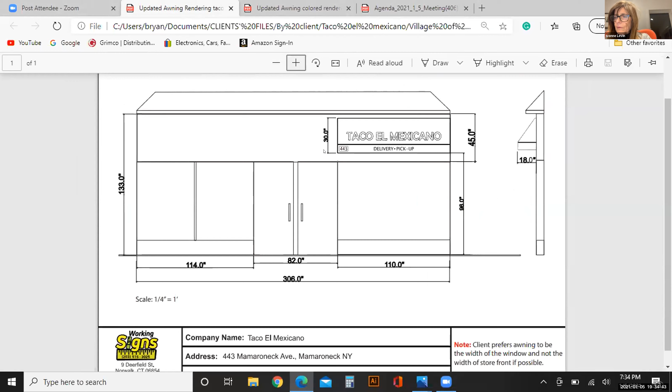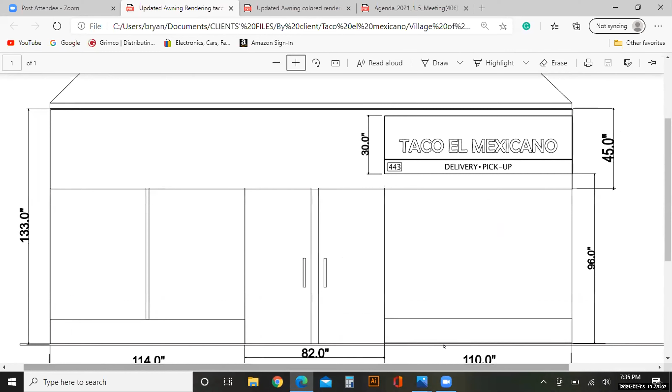Uh-oh, we can't hear you. I don't know, sorry, can you hear me now? Yes, we can. I don't know where you stopped hearing me. The last thing we heard is you said you had taken off the phone number and then said 'and also,' and that's the last we heard.

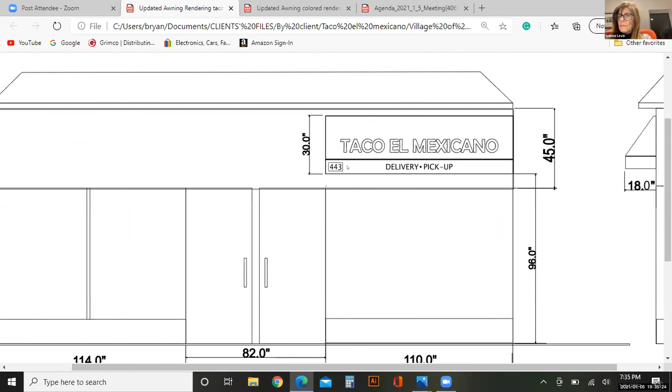Oh yes, I'm sorry. And raise it to 96 inches from the ground. I told the customer about the suggestion of going over the door, but he said he prefers to go only over the window, just to match what's next door. If you can see it on the side here, it's the same, just over the window type of awning.

Okay, interestingly, it appears that that awning next door is too low, so when that comes up, make sure that's clear also. Okay, thank you.

I think there were some other things we discussed last time, just to mention them. We talked about when you took off the phone number, how you were going to recenter it. I see you've opted to put delivery pickup in the center and leave the address on the left. We also talked about the color of the awning, which somebody suggested maybe could match Enzo's. I don't know if it does or not, but I'd ask you about that.

Yeah, I asked the customer about the color. He said if possible he prefers to keep that color, that's the color he likes. I asked last meeting too, and said it's possible either way, you guys prefer to match the other store next door, but the customer prefers that one color if possible. I don't know what others think, but it's probably okay. I think it'll be more critical whatever color goes on the next door store, but I'll let other people say what they think.

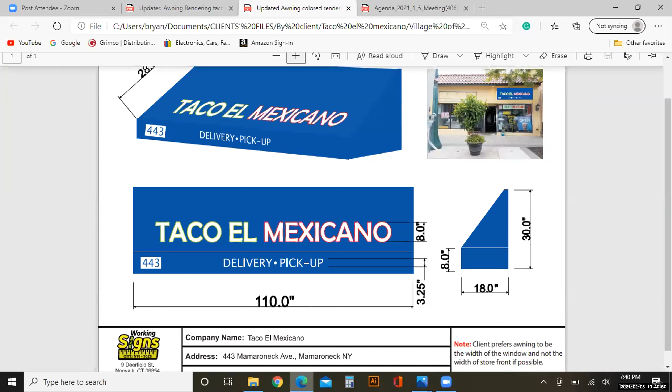Yeah, because this is pretty much to scale, so that's 8 feet. The awning is 8 feet from the ground there, but it shows it there. So I think if I put it next to this picture, it would be about the same height at the bottom as this one, I believe.

Because it will be higher than the one next door to the left. Maybe it does line up. I don't know, these people may not - I don't know what the height is, but it's just one concern I had.

Well, in fact, looking at a straight-on street view, it looks like there's that nail spa one there. But if you look at the bottom, Andrew, do you still have that up? If you look at the bottom edge of the pink ones, you can see that's a good deal higher than the bottom edge of the Wendy's nail spa one.

So they are in fact higher. I'm not sure it's really 8 feet, but certainly the nail spa is not, and certainly that pink one's not either. I'm looking up and down the street on the street view - definitely as you go further down the street, they all tend to sort of line up, though I'm not sure they're all compliant.

Maybe the answer is you make this one right and then the spa has to comply, and then things will line up. Yeah, that's the main thing, is to get the spa one to line up. Okay, so...

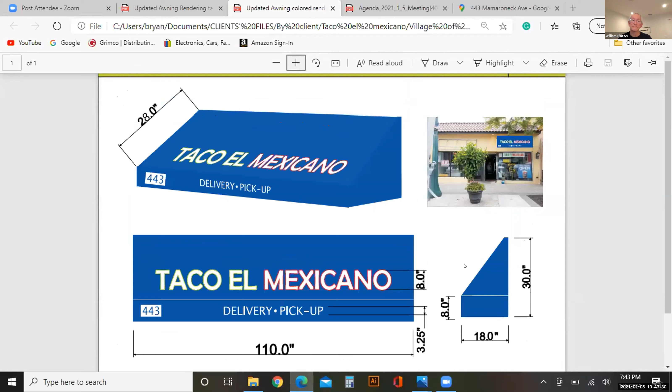I do not see anyone who wishes to speak. Are there any further thoughts from the board?

No, I think we're all kind of wishing it lined up, but also thinking it probably needs to be code. So when the next guy shows up, he's going to have to raise his awning. They're going to have to match. Yeah, that's what will happen.

Okay, any further comments from the board? If not, could I have a motion? I motion. I second. Okay, any opposed? No? All right, very good, Bryan. You're good to go.

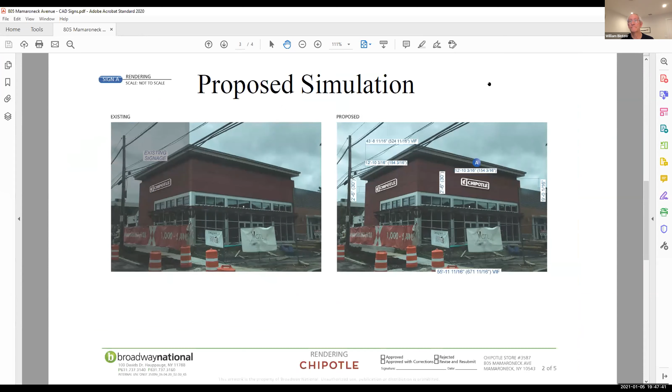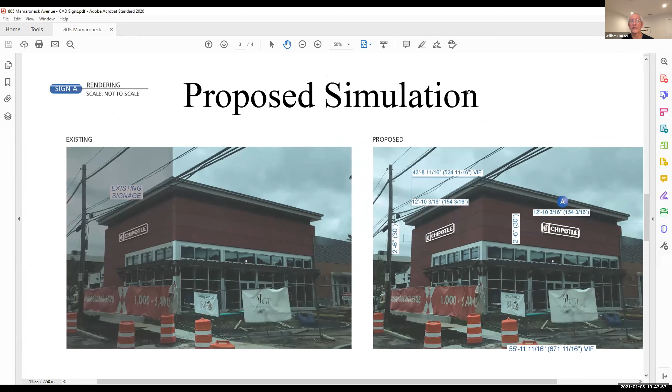Okay, now I believe I saw in your materials an elevation with the simulated sign from the parking lot. Yes. You might just put that up if you have it handy. Let me see if I can zoom in a little bit. No, I meant there was one that showed the whole parking lot elevation with the Chipotle sign on it. Oh, you mean this photo here?

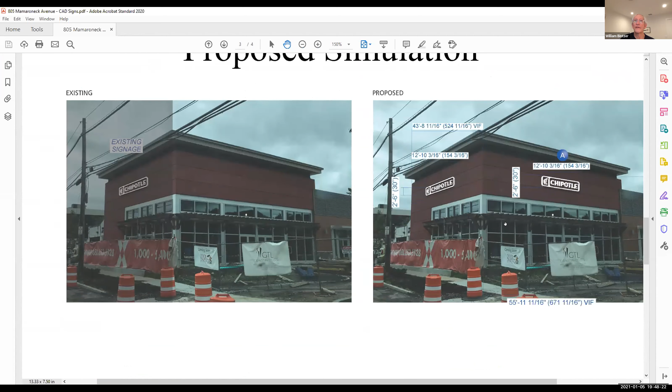There was one that showed the whole thing, the whole mall, like the whole shopping center with the sign on it. Yeah, there was one that showed it mocked up. It was a nice picture. This is the mock-up, this is the existing. No, there was one that showed it as it is now in your materials, the ones we got anyway. You mean with the signs of the other stores? Yeah, sort of like standing in the parking lot looking at the whole thing. I just thought that was a helpful picture. I don't know that it's a huge deal, but I know that there was one. Sure, let me see if I could pull that up.

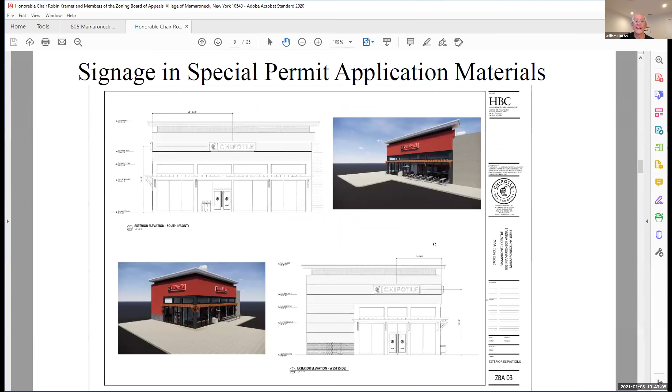This might have been from the Zoning Board of Appeals. Yeah, that was it. It looked like this, like that shopping center, but it said Chipotle on it. Right, yes, there was one like that that said Chipotle. There really was. I believe you. I believe you. There you go. There you go. There, yay, got it. See, I did look.

Okay, I think that's the most helpful one to look at. Okay, great. I think it looks fine. I do too, it looks good. Looks good, it looks good. Okay, anybody have any comment other than it looks good?

All right, anybody from the audience, Amber? Let me take a look. I do not see anyone wishing to speak. I'll motion. I second. I'm good.

Okay, that's easy. I think we were pretty well prepared for this one. Having been told it was going to come, and then seeing that it was coming, and then it came. I think we all knew what to expect, so it looks fine. Thank you, good luck with it. Great, thank you so much, I appreciate it. Happy New Year. Take care.

So, okay, the next applicant is 600 Lorraine Street.

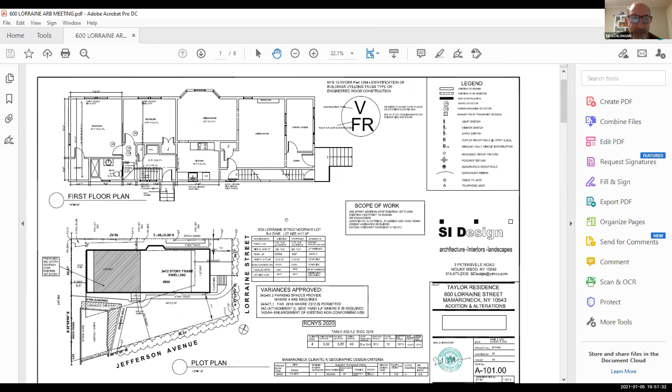This application, 600 Lorraine Street, is for a second-story addition on top of an existing first floor, and the addition is partially over it.

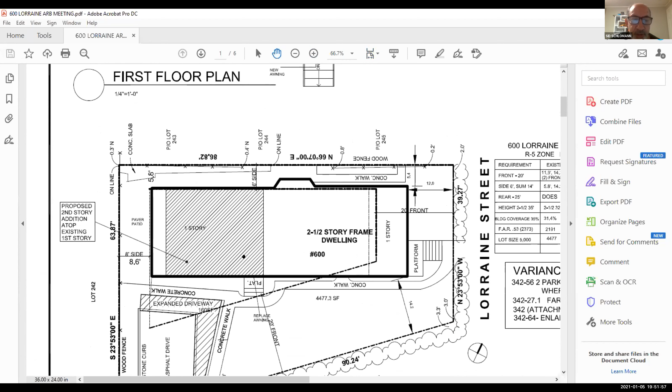We needed to go to the zoning board for a few variances. If you see here in the shaded area, the existing house in the front is one-story, in the middle portion it's 2.5 or 3 stories, and in the rear portion it's existing one-story. The shaded area here is the proposed addition. It's an existing 2-family house.

Just in terms of reference, floor plans, the goal of the project is to add an office, 2 bedrooms, and a bathroom up on the second floor for the owner-occupied primary unit.

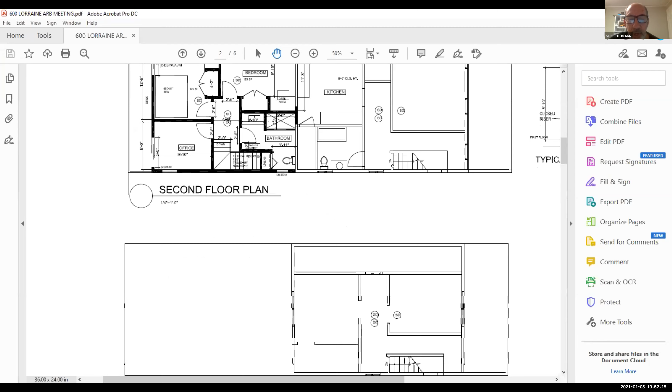So I was confused by this, if I could just dwell on the plans for a second. So if you go to the first floor... well, this is the first floor. So the entire first floor is for the owner-occupied primary residence. You can either go up the front steps and into the door here where it says entry, and that goes right into the apartment, the entire first floor. Or you can come in the side door here by the driveway, and that takes you right into the apartment.

The unit upstairs also comes up. I just want to clarify, so how do you get from, let's say you're in the living room and you want to go to the bedroom, how do you do that? Actually, this right here should be a dotted line, it's just an archway, not a wall. So that goes straight through to bedroom number 2. So right now it's 2 bedrooms, and that was what was confusing me, it looked like a whole separate unit there.

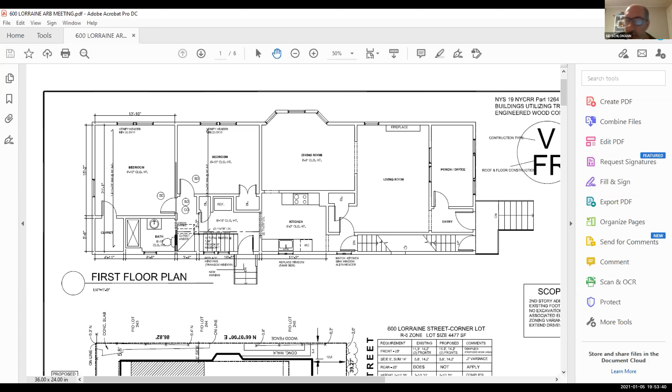Got it. And then for the upstairs tenant, they basically come in the front door here and go straight up the stairs, a self-contained second floor and above unit. Okay, now let's take a look at that. So they come up those steps to the second floor. From the first floor, they come up the steps, then they land on the second floor right here.

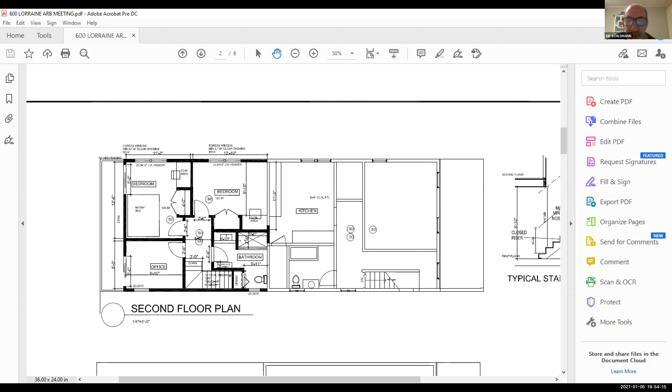On the second floor, they have the bathroom, the kitchen, and this other room, which wasn't referenced in detail because we were focusing on the other side. So this is a living room here. So basically they have the front half of the second floor, plus they have the front half of the third floor, which is, I guess, a half a story. Okay, now in the rear part is a roof.

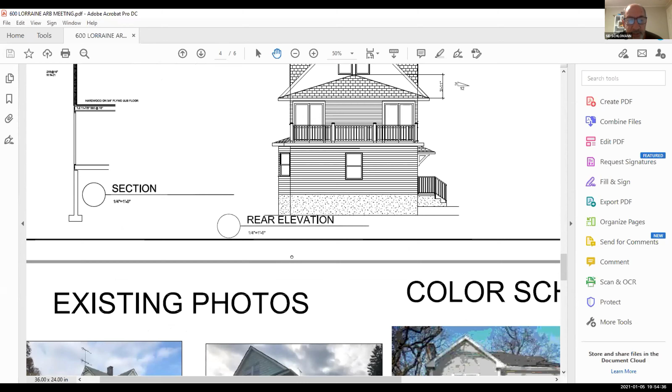I'll just continue. So right now, let me just go to the existing photos so you can see. Okay, so this is the side entrance here. If you look at the upper left photo, the middle portion is 2.5, almost 3 stories. Right here on this left part is where we're proposing to put a 1-story addition, which will then be connected to the first floor apartment.

In terms of exterior, which you're probably more concerned with, you can see there's some mismatching siding and windows. Our goal is to re-roof the entire house, re-side the entire house, and replace windows within budget.

Here's our rendering, which will be a light gray siding, a hardy cement fiberboard. The name is night gray with white trim, a charcoal roof. The windows are Andersen 200 series.

There are no grills in the existing windows, so we're not putting grills in the additional windows. We're trying to make the whole house cohesive in terms of color and trim. This will be a 4-foot balcony for the new addition, which is where the zoning board required us to stop the addition.

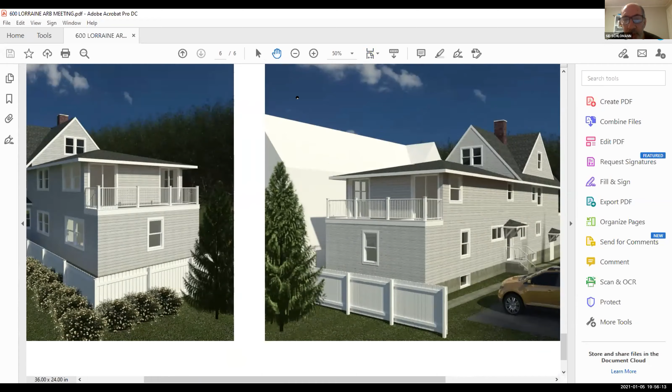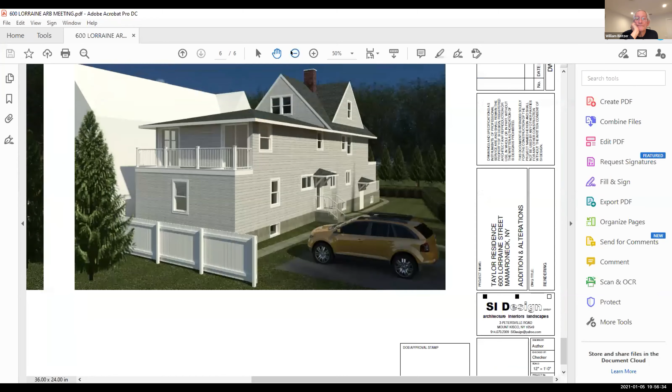So you can see the difference from the existing green and kind of beigey pink siding to our now cohesive light gray and white trim siding. Looks nice. Yeah, it's an improvement. I think it'll be a big improvement.

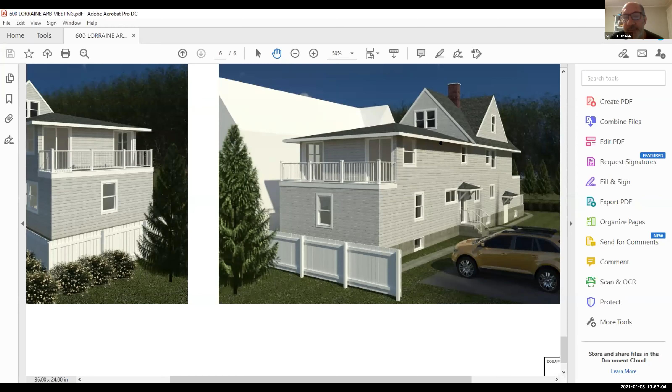You keep referencing if it's in budget, what's the plan here? Is the entire siding gonna get replaced? The siding is 100% getting replaced, as is the roof. The new windows will match the existing. The only thing that's a maybe is whether or not we're replacing all the existing windows with new ones, but they would be the exact same size, same style. It's just whether they're new or not.

They will probably be repainted, I guess, at least as a minimum, or not? I thought maybe they would be repainted, the old ones, if they stay on that top floor. You can see the existing windows, a lot of them are vinyl, like there's nothing to paint. They're not wood, they're vinyl.

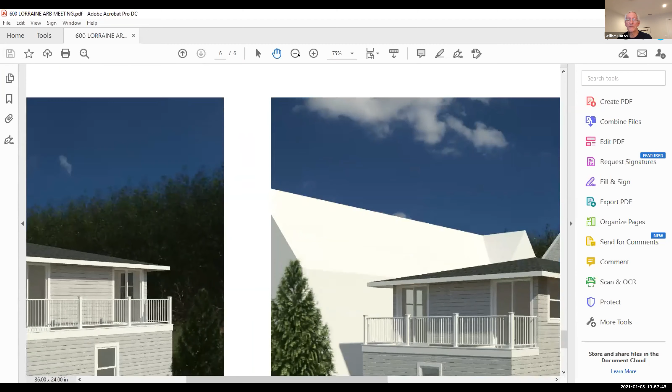I spoke some with Amber about this, but just for the record, I understand that you do have all the necessary zoning approvals. Correct.

Can I ask a question? So originally the addition went all the way to the end and they asked you to step it back, to reduce the mass of it? They did. Originally, we proposed to go all the way, and the bedrooms upstairs would have been larger. One of the variances was for floor area ratio, and they wanted to cap it at 14.9%. I see, got it.

I understand that they lost a little bit of square footage for their bedrooms, but it looks nice. No, it does look nice for the neighborhood.

Are there any other comments from the board? Questions? Okay, Amber, any audience members wish to speak? Doesn't appear that anyone wishes to speak.

And given this is a significant addition, I just want to confirm that the signs were posted for neighbors to know about this. Is the owner on? I believe the owner took care of everything. Amber, is Brian on? Yes, he is, and we do have the affidavit of signposting. Okay, cool, thank you.

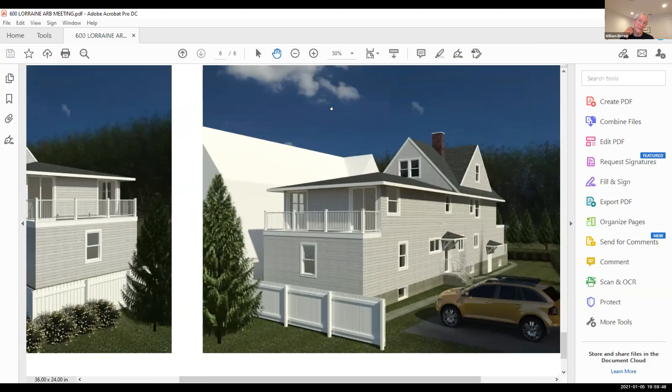So there being no more questions or comments from the board or from the audience, could I have a motion to vote on it? I motion. Second, anyone? I second. All right, I'll let Barbara figure out who was first there. And any opposed? All right, you are approved. Thank you, it looks good. Thank you. Good night.

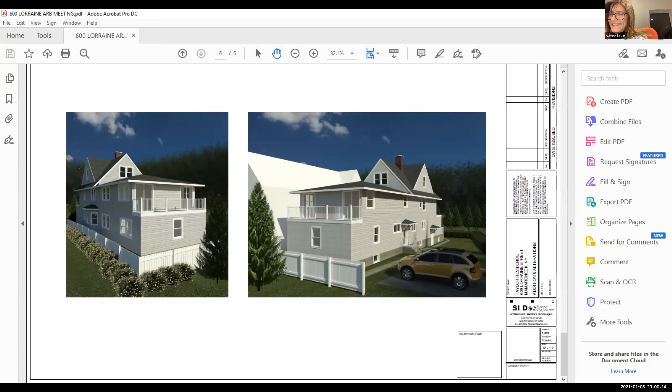Okay, so next is 705 Monroe.

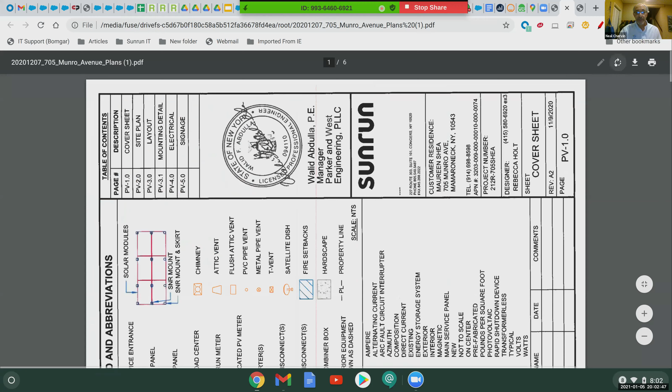Okay, so these are the general electric notes. I'll show you, this is where it's going to go up on their roof. So this is where we planned it out. They have two planes. Could you point out the front of the house? Okay, so this is the front of the house here.

Where it says N, right? Array AR2. There's array 2 and array 1. And this is the best placement for their solar, for access to the sun.

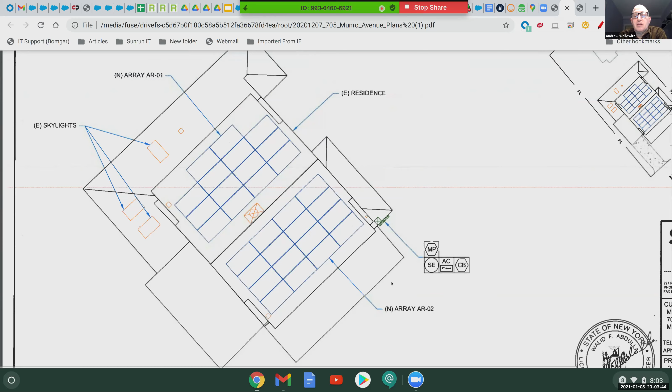Are you able to back that out a little bit so we can see the rest of the drawing, the plot plan, and where north is? Oh, there's north, now I see it. Yeah, you can just back it up a little bit, zoom out, you're too close. There you go. North, okay. I can't zoom in and out, but I can go up and down.

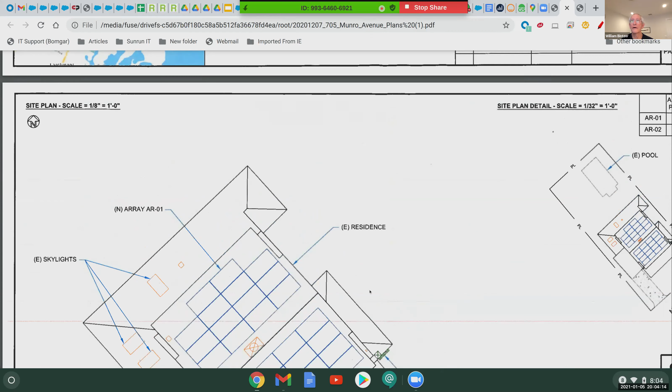So that's north. On the right, there's a pool in the back. There's a driveway on the left. There were some photos - I don't know if everyone saw the photos on the tab labeled application. I think there's pictures down at the bottom, the first one there. Oh okay, let me go back to that.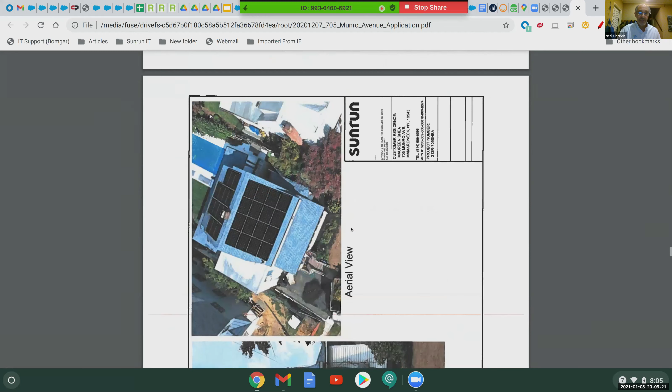So this is an aerial view, sorry that one's a little sideways, but yeah this is what it would look like. Okay for you guys? Yeah, there's another, I think there might be another one further down too.

So, all right, do you need to see anything else? I think so, just go to that front elevation picture, let's leave it on that one. Yeah, let's go back to the actual house.

Bless you. Bless you, thank you. There you go. Okay.

Okay, anybody have any comments, questions, or thoughts? Sounds like nobody has any comments, questions, or thoughts. No, we've been doing this for a while, there's not too many. We are the number one residential solar company in the US. We have 500,000 installations nationwide. That's a lot.

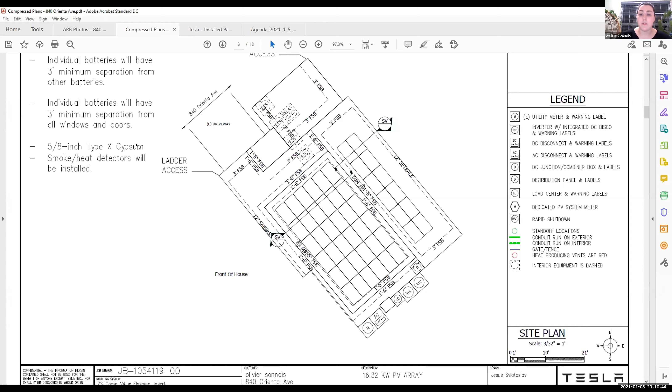Sorry, this is the house that just got the renovation, right? Yes, it's still actually in the midst of the renovation. And they have a dog. They do, a small one. Every time you walk by there's this little yippy dog.

Most of the panels are going to be located on this roof plane here. However, they're not going to be visible from street view, so we didn't provide a rendering there. We showed you a bit in the elevation here of just where they will go, but because of the pitch of that roof, it's not going to be visible unless you're incredibly tall.

There's also a row of hedges, isn't there? Yes, there is. Most of the house is actually blocked from the street, and they have that little side street as well, so they're set quite a bit back.

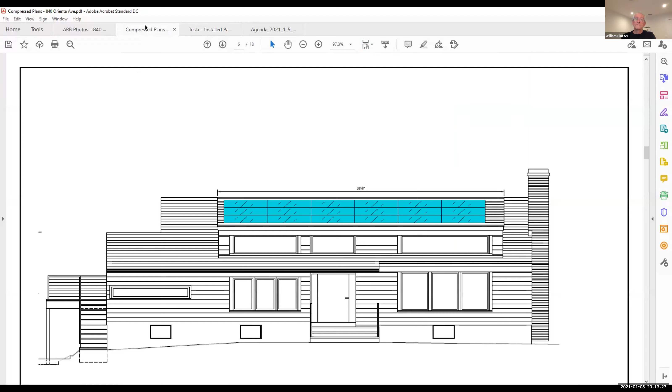Okay. Any other comments or questions from the board?

From the audience, Amber? It does not appear that there's anyone from the audience who wishes to speak. Okay.

I'll give the board one more chance in case they thought of anything they want to ask. And absent that, then I guess could I have a motion to vote on it? I motion. I second. Any opposed? No. All right, very good.

It looks nice, the whole renovation looks nice. That's beautiful, nice. Yes, hopefully now we're able to get it wrapped up soon. We've been working on it for a long time. Seems like they're on their way, hopefully by spring. Yeah.

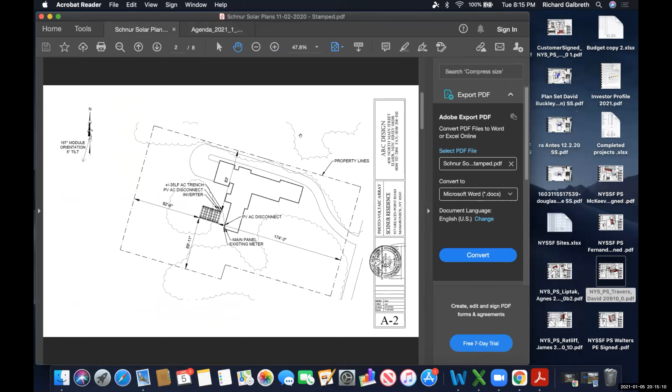Hey, can you guys hear me? We can, yeah, all yes. All right, let's see here. Let's see if I can get this shared for you. Can you guys see what's on my screen? Yes. All right, so we're working at the Daniel Schnur residence on 937 Greacen.

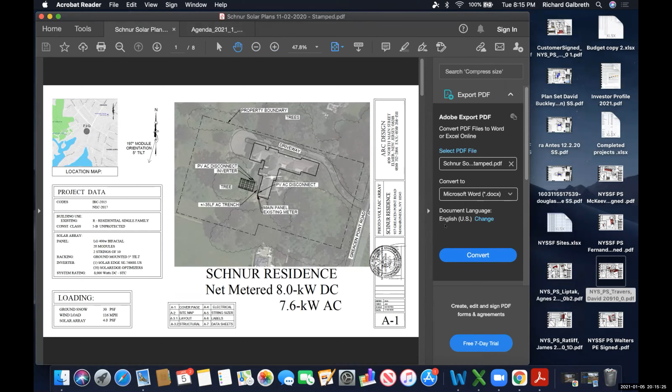We're looking to add a small ground-mounted solar array behind the house, tucked in. We don't plan on cutting down any trees. Basically, this solar array is just to charge the batteries that we'll be placing in the house next to the main service panel, which is in a utility closet or utility room type thing.

I've been working directly with the designer that's been redoing the exterior of the home for the last 2 years. So everything that we put in will be painted and done to basically the exact same aesthetic that the house is done. We can't put anything on the roof because it's all slate, and they kept it as original as possible with all the copper flashings and everything else.

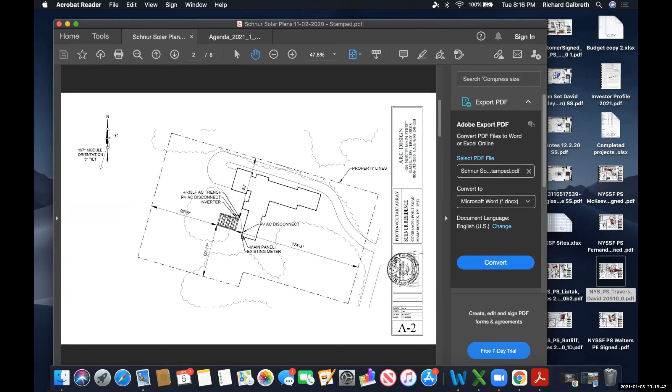So that wasn't an option. And in order for any incentive to be put in on the battery installation, we had to add solar. So this is basically where we want to put it. It's well within all the clearances. The neighbor to the south here, I'll show a photo of that in a second. Out here is the Long Island Sound, and there's really nothing else out that way, but I'll show a photo of that as well.

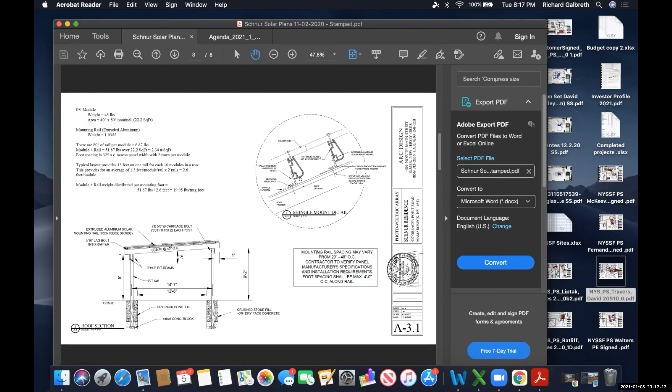We went with the minimum tilt, so it'll look just like a standard pergola or any sort of open deck covering. The panels are bifacial, so there's no back sheet, it's just glass, so they're basically like almost a see-through panel. So the grass that is underneath where the pergola will be mounted will still grow the same way it does right now.

So I tried to mock it up as well as possible with the photos we sent, but December happens to be our crazy busy season. And we also were the ones that put in the ground mount that's on Orienta Ave down the road, which I'm sure no one sees from the road. So we want this to be as aesthetically pleasing as possible as well. So let me see if I can go back to.

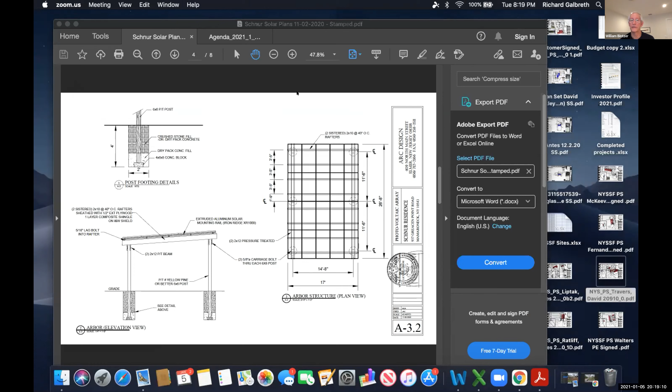Looks pretty straightforward. Are there any audience members wishing to speak, Amber? I don't see anyone who wishes to speak. All right. Okay, any questions, comments from the board? All right, well, looks good.

Okay, so looks good. All right, so could I get a motion to vote on it then? I'll motion. Okay, any second? Second. Any opposed? No. Okay, so very good.

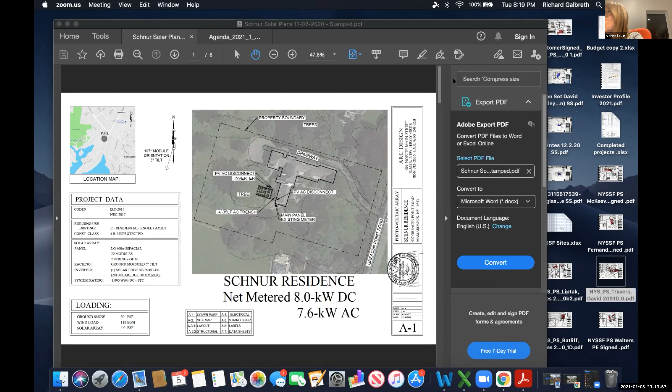And so that leaves the final one, I guess, 448 Mamaroneck Avenue.

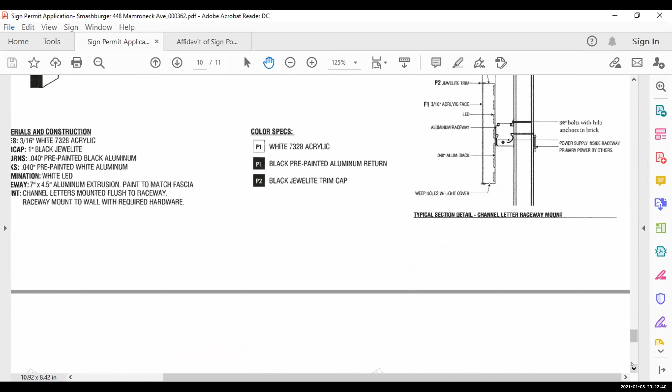There'll be channel letters mounted on the raceway for the first sign on Mamaroneck Avenue, and the second sign is just a face replacement on an existing cabinet. Does anyone have any other questions?

So it's black - okay, the background is black and the letters are white. Can you go back to the elevation, please? Sure.

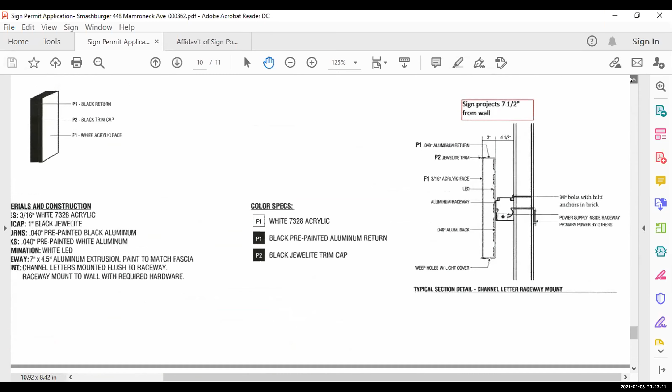This one's good? Yeah, and the other one as well, please. Okay, so all you see is the letters, the white letters. Correct. And then the raceway behind it, you're saying is black? Yes. Okay, but it's not like a bigger plaque like that? That's why I asked you to go back to it.

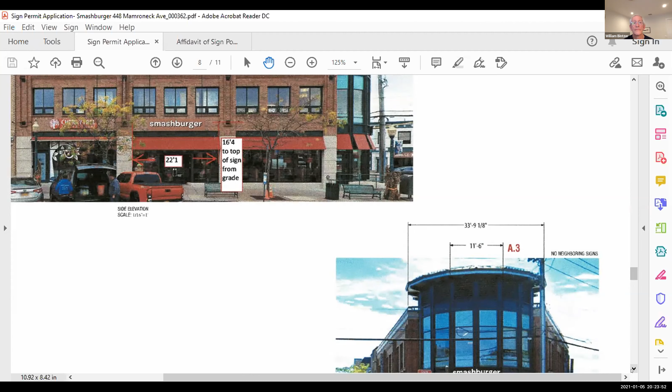I think the back of the sign will be black, and that would match the raceway. The white is just the face. Correct. But okay, I'm a little confused now.

Scroll down a little, would you? There, go to the drawing. Keep going, a little further, little further. There, right there. Okay, so yes, it will be black behind here. Now that black band doesn't really show on the elevation mock-up there, correct? But even if you keep going down...

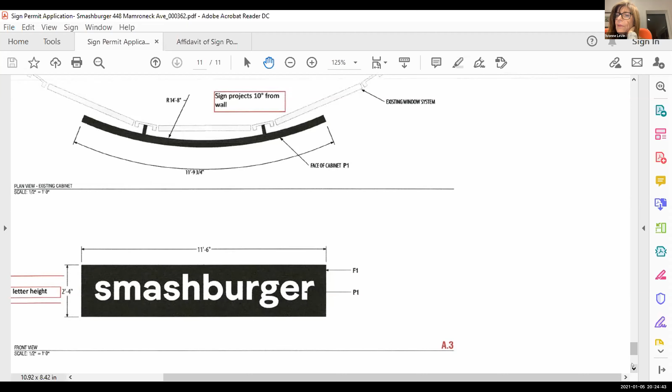Okay, yeah, keep going down. This one is different. Now this one has the background - it's 2 foot 4 inches in height, and it's black, correct? So this is somewhat different than the raceway letters. This is an existing cabinet, and this is just replacing the face of the existing cabinet. The cabinet itself is not being touched, just the face is being replaced.

Okay, and that sign's non-illuminated? This sign is also illuminated. Oh, it is illuminated? Yes, it is illuminated, okay, existing, yes.

I have to ask, do all of the signs match each other? Well, I'm confused now - they're two different types of signs, and I guess it had to do with when the first one was approved. This cabinet is on a bend, so I guess they made it somewhat circular in nature.

It's also on a spandrel that's black colored. The other one's on brick, so you wouldn't put the channel letters on the bend. Okay, these letters will be surface mounted to the cabinet?

The panel is just being replaced in the front, so it's going to be white vinyl on top of black aluminum. Oh okay, so it's flat, they're flat - correct, vinyl letters. Where the other one is, is acrylic letter face with aluminum back.

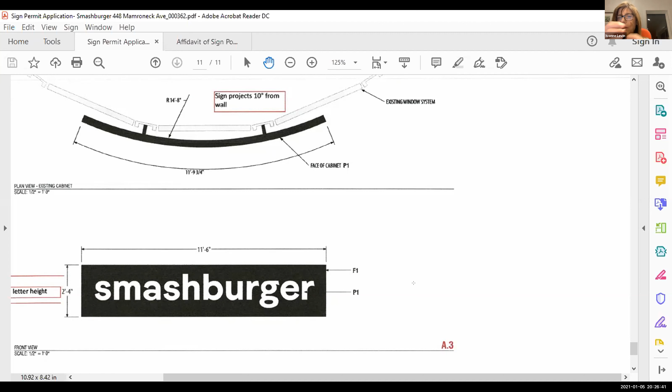So this will read like a flat sign, while the other one is going to have volume because the letters are kind of floating. I think the look here, they'll both pop out in their own way. But yeah, I don't see too much change other than a cleaner look than the existing signs.

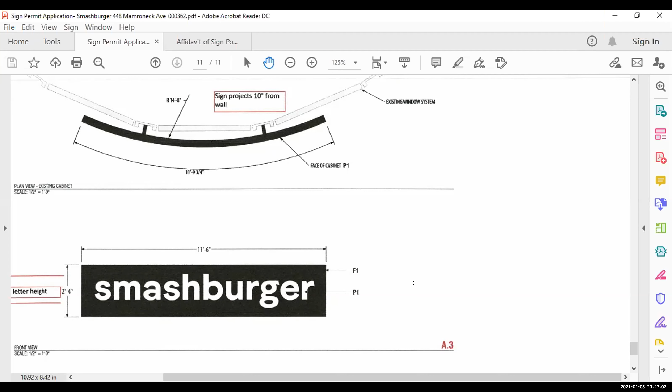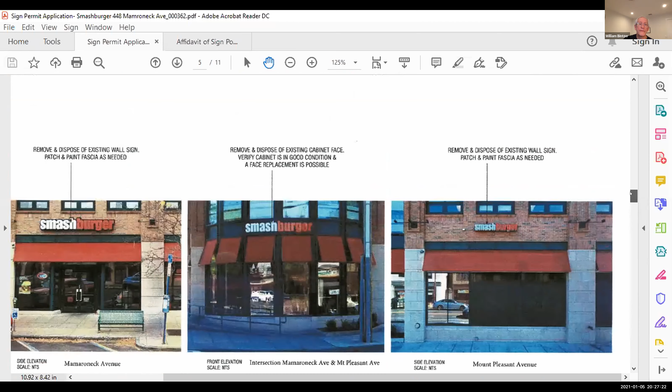Yeah, the existing - so if you look at the pictures, maybe go back, I think it might be helpful, Gilbert, if you go back to the pictures of the existing signs. Keep going up a bit more, to where you can see them in 3D, not straight on. Oh, and 3D, let's see. Yeah, a little bit more up. Keep going, yeah that was it. Nope, maybe a different thing, but yeah, there's some 3D ones that you have.

It's under - maybe a different thing that says photos. I kind of combined everything I had into this one document. Well, there's one that showed it at an angle, and you could kind of see it in three dimensions. Oh really, I didn't see that. Yeah, I'm sorry, I'm not familiar with that.

The fact is that they're on different surfaces, completely different forms and different color backgrounds and everything. Yeah, I think it looks fine. I was trying to understand, and I believe it looks good to me. Yeah, right, they're different signs because of the different backings - that's really probably what it came down to. It makes sense when you look at the curve, that rounded wall at the corner, and where you have the black background.

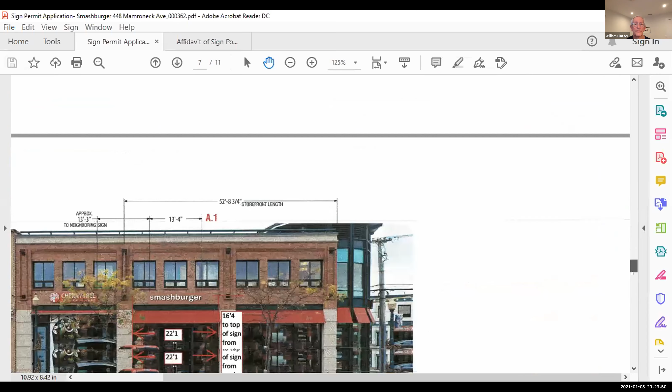Anything else? Should I scroll down more - are the heights of the letters the same? It looks like a little smaller, but maybe just because of the graphic presentation. The heights of the letters are both 18 inches max, which is to code. Okay, that's fine. If I slide over, it shows the 18-inch letter height, and 2'4", 28-inch is the band.

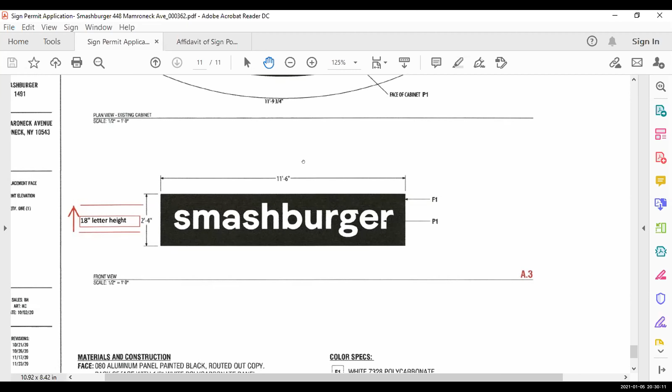I wonder if the ones that are there now are a little taller. Yeah, also to code. And these are not narrow like the existing ones - there's a little more space in the font. Yeah, I think it's a much more attractive font. Yeah, yes, okay.

All right, any other questions or comments from the board? No.

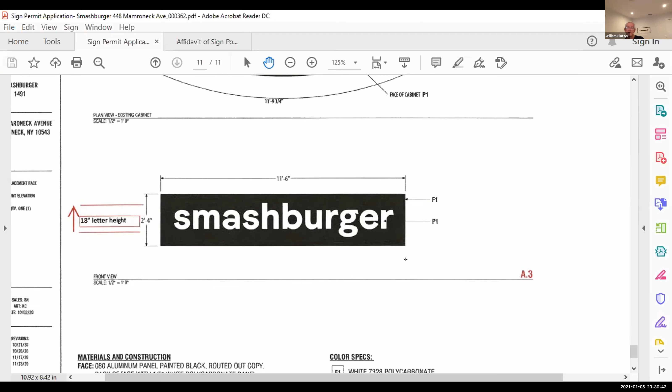And Amber, from the audience? I'll have to show my son because he flipped burgers there when he was in high school.

No, there does not appear to be anyone who wishes to speak. Okay, there being no further questions or comments, could I have a motion to vote? I motion. I second. Any opposed?

Okay Gilbert, you're good to go.